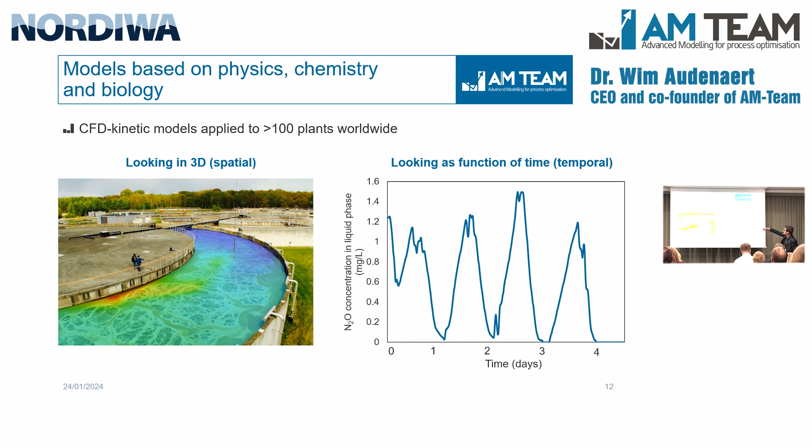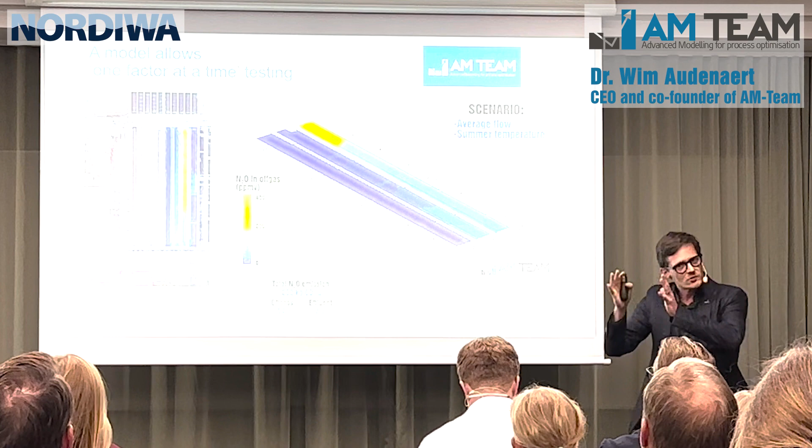And of course, you also have models that look dynamically. For example, what are the peaks, the N2O peaks? This is data from a real plant, and you can see the fluctuations are huge, and this is not new information, of course. But the models can predict at least some of these fluctuations, and we can look at them. So we have spatial models, temporal models, and this is an example from a Canadian reactor. I'm just going to play a movie.

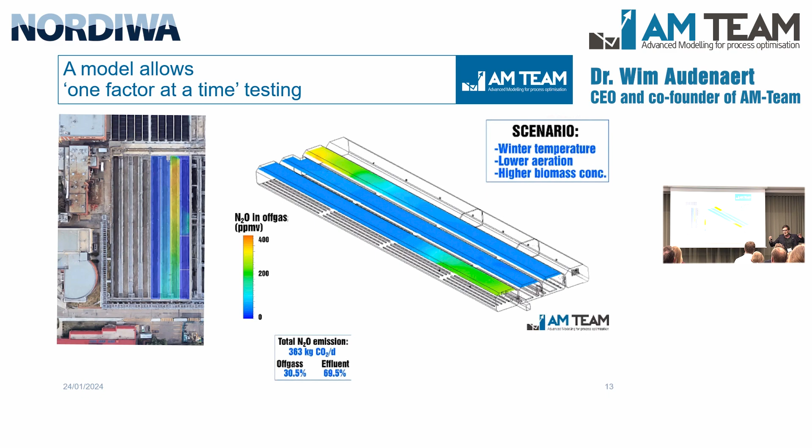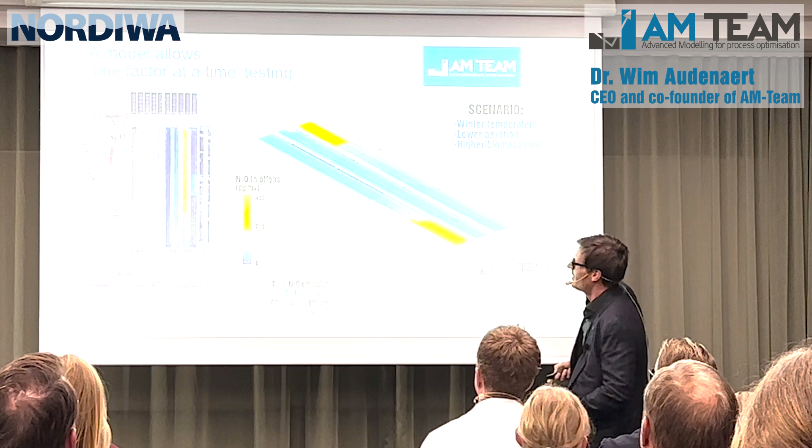Look at the gas concentration of N2O that's being stripped and how it shifts according to what we change. It can be operation, it can be influent, it can be your aeration rates. But the thing is, this is how dynamic it is. Of course, it's hard to know with one sensor how dynamic and in 3D it is, but this is reality, how things shift in a plant. So it's highly dynamic, quite complex how these zones shift.

So one thought here on sensor location and data interpretation. So a bioreactor is like a coffee cup. Everybody knows this. Maybe not. Don't try this at home to cut it in half. Will not work, I think. But anyway, it takes some time to mix your milk.

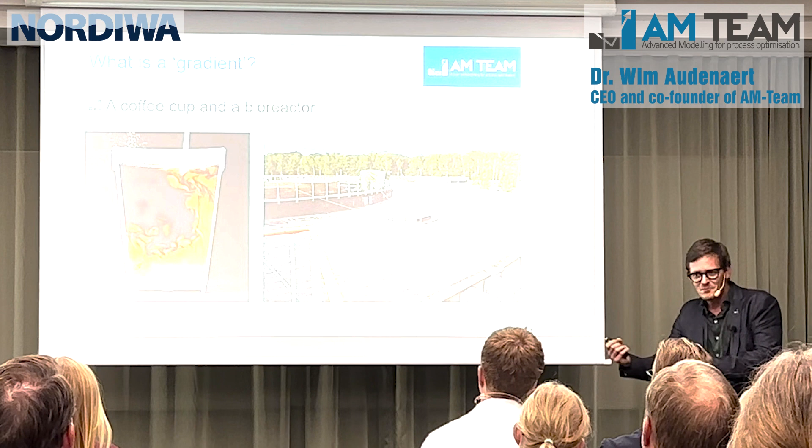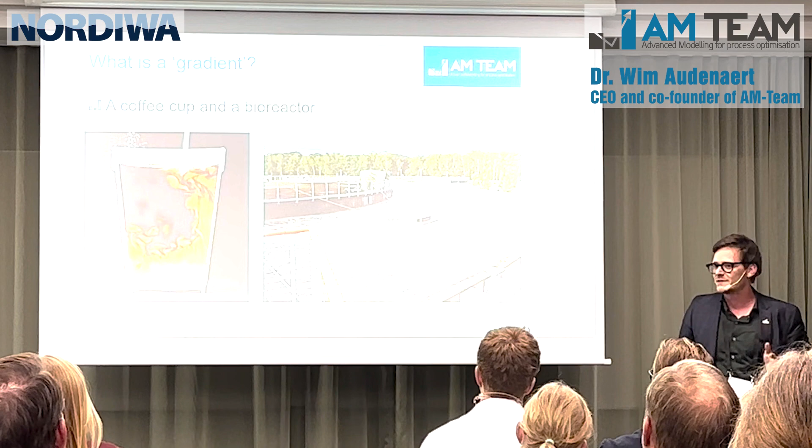I typically also explain to people, if you take a bath and somebody pours in some new warm water, it takes a while. You literally have to stir with your arm quite a lot. Of course, these are systems of thousands of cubic meters. So they are never perfectly mixed. It's really impossible. It's economically infeasible, and it doesn't make sense. Now, the result of that is we have gradients.

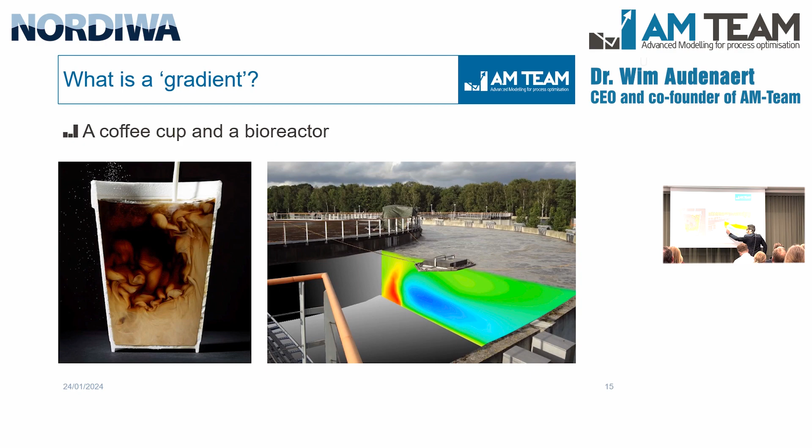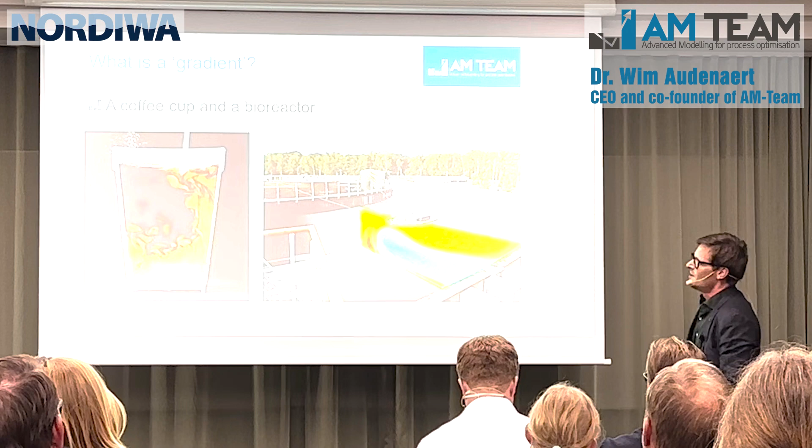This is, for example, a gradient of dissolved oxygen, and we have validated this model, so I can definitely send you some information, but we literally validated it with a 3D measurement campaign years ago. So these gradients exist. They can be 200, 300% in one cross-section. Depends on a lot of factors. But inherently, this leads to gradients in N2O as well, of course, obviously.

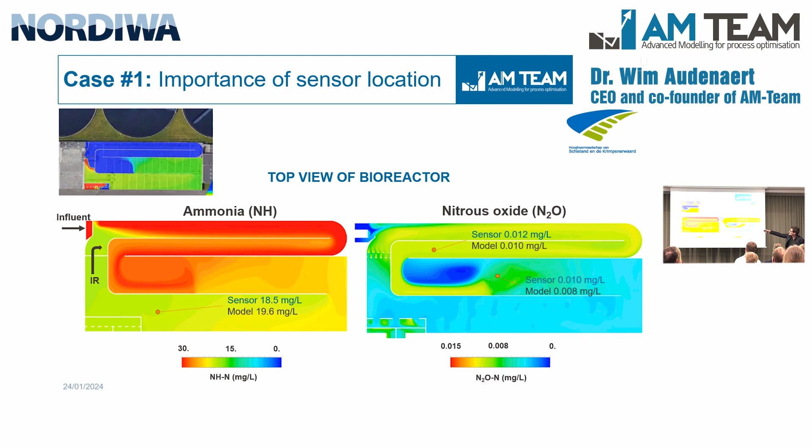So this is a real reactor from the Netherlands. We are looking from the top here, and this is the ammonia profile from the top. We just cut it in half, let's say, and this is the same gradient of the nitrous oxide in the liquid phase. So you can see, of course, ammonia gets oxidized. That makes sense, it reduces. And then your N2O gets produced, and it travels like that. It gets stripped, and the concentration decreases.

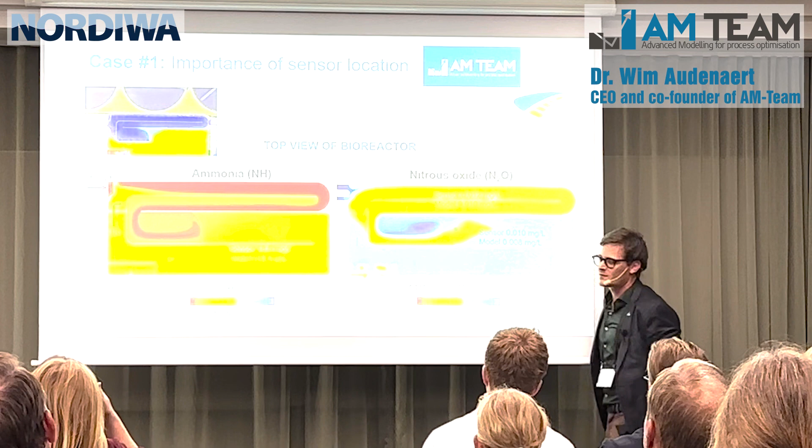Now, there are a couple of observations to be made. One, this is a dead zone, so there is a zone apparently in this reactor with very low N2O levels. Just imagine your sensor would be moved a few meters, this or this. It makes a lot of difference.

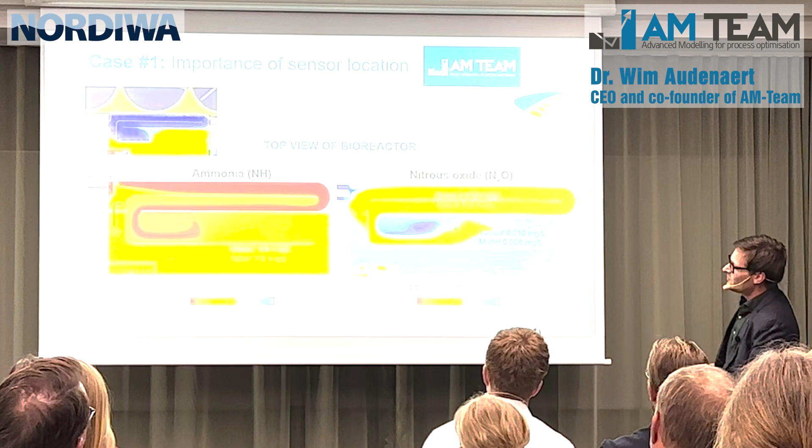When you look from the side, at the location where the sensor is located, the sensor in the anoxic zone, which is actually used to calculate the emissions, then you can already see that you have a vertical gradient of 30% in this only 4 meters depth reactor. It's not really a very deep system. So it means if you do a sensor reading here, in this case it is not representative for the real flow coming through. It is simply a huge uncertainty.

Now, you can say, well, this is detailed, these simulations, but the question is, can we really neglect these things if we want to know what we are doing in the future? This is not exceptional. We see it a lot. We have modeled over 100 reactors at the global scale with this model. So it happens.

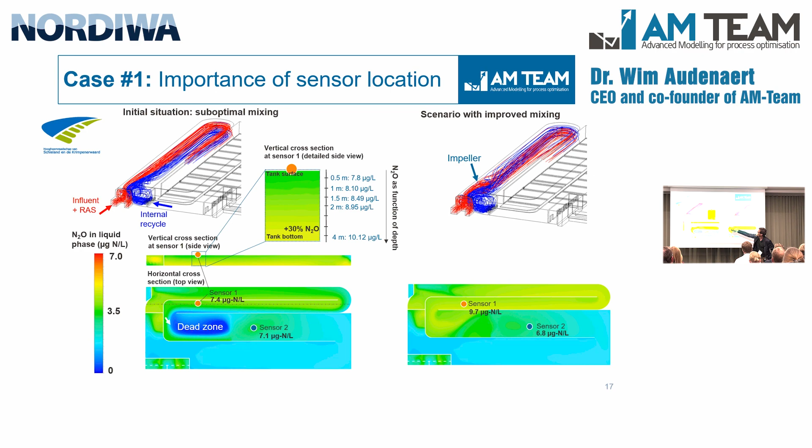And then you can use the same model, for example, to fix the mixing. Just imagine you fix the mixing here, you do something, the mixing is okay, and then you can see this dead zone disappears, and your reading is very different. So it's like a 31% difference in the resulting reading. Simulated.

Now, that was on the sensor location. Now, on the mitigation and the quantification of your baseline. So this is a reactor from Watercare in New Zealand. This is, again, the top view. The water goes like this. Anoxic zone, aeration starts here, and it goes like this. It's all aeration. So this is, again, the simulated liquid phase N2O concentration. So that's the color gradient here, high to low. And you see the stripping happening again, yeah? So it turns dark blue.

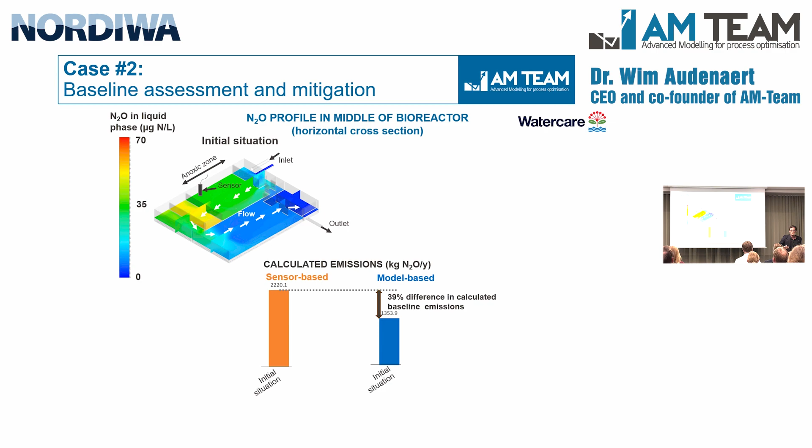Now, the interesting thing is, just imagine you would have your sensor here and quantify your emissions based on the sensor or with the model. It leads to quite a big difference in this case, so 40%. Now, of course, we can debate a lot who is right. Probably reality is somewhere in between, but that's really a big question. It's 40%, who is right?

Now, why are they different? That's an interesting question. Well, you would assume everything goes downstream and gets stripped. Why is the model giving lower emissions in this case? Because a lot of the N2O is being consumed in the aerated zone. It's not all getting stripped, and it's really significant. This part is getting eaten up in the aerated zone, because the dissolved oxygen, I'm not plotting it here, has a huge gradient. It's quite low in certain zones. So you cannot simply assume complete stripping. That's one thing. So biological factors are not taken into account.

Now, something interesting happens when you mitigate. Just imagine you extend the anoxic zone and you push the air more here. So same airflow rate, but some more volume for denitrification. You get rid completely of this yellow zone. So you don't have this spike of autotrophic organisms giving this boost in N2O.

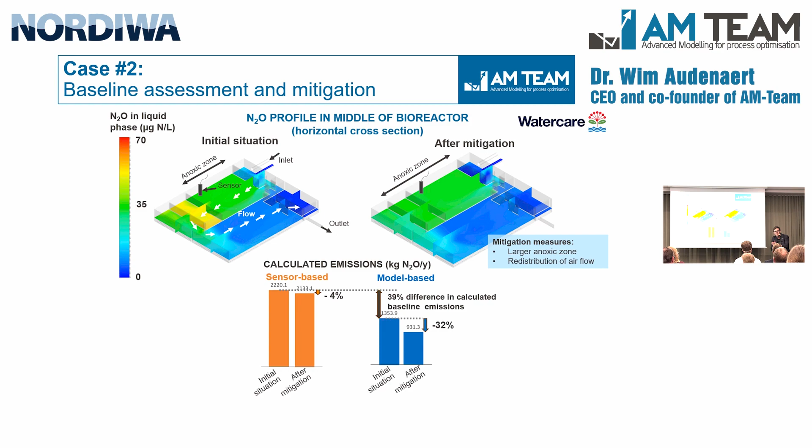The interesting thing is, with the sensor, you would never capture this. So with the model, you would see a 30% reduction, but the sensor is actually upstream of that zone, so your baseline was different. Don't get me wrong, my message is not that our measurements are always over-predicting or under-predicting. I'm just saying that the differences can be big, and we should just be cautious how we interpret things.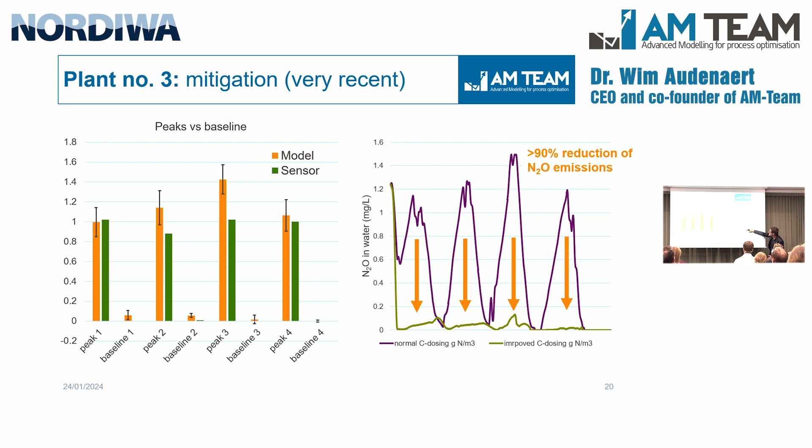This is another example from a recent project where we are using a dynamic model right now. It's not a surprise that you can indeed, with smarter carbon dosing, mitigate these big peaks. So that's what we are doing now, and in this case it leads to drastic mitigation, as you can see. They will implement this system, so they already had an idea about the COD-N ratio, but now they can really implement these changes in their plant, in their control.

But what I also wanted to say, and this result is very recent, is that the model also in quantitative terms starts getting very close to measurements right now. We are very much working on this, but it was a non-calibrated model, so we didn't tweak these parameters yet. And so quantitatively, we are getting close.

Okay, so what are the conclusions of my presentation? In the current way of working, we really neglect some fundamental physics and biochemical pathways. This also means, for example, just imagine you use liquid sensors to assess emissions. Theoretically, you can prove that it's impossible to close your mass balance, because if you don't measure your off-gas, you can never capture the fact that there is production and stripping simultaneously in an aerated zone. I know we may need to discuss some technical things, but there are some essential physics and biology we might have to consider in the future.

The models, I think, we can really use to speed up closing the knowledge gap we have, because the learning curve is so steep, and we heard it. There are more stringent effluent limits to be expected. There is a challenge of micropollutants. Now this comes on top of it, N2O. So the question is, can we not make this process way more efficient by adding an additional tool, and really speed up the learning.